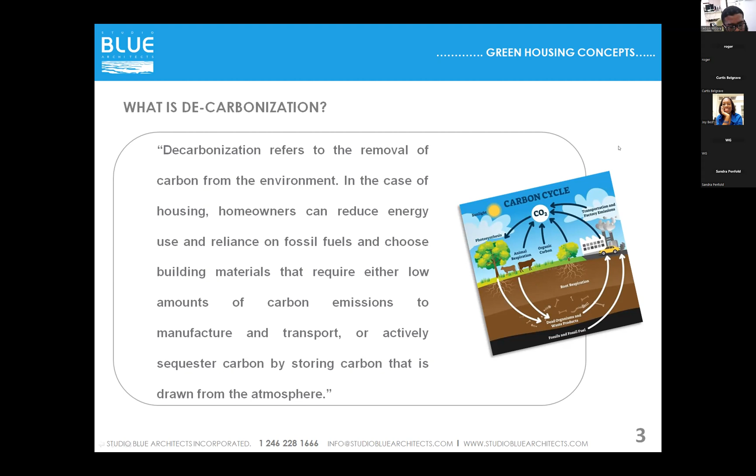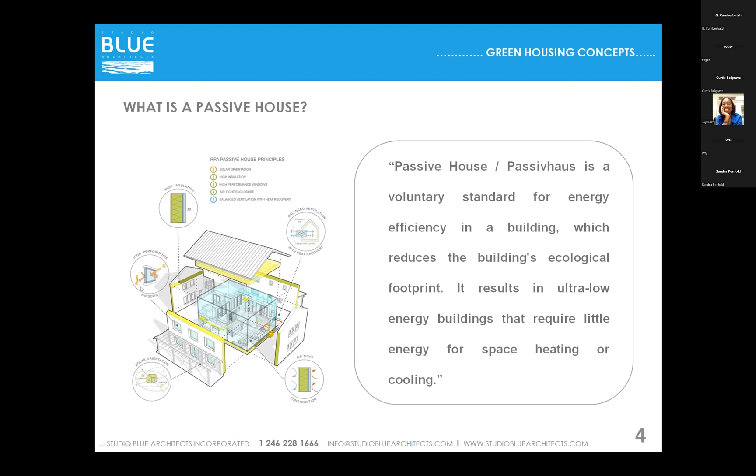What is passive house? Passive house is a voluntary standard for energy efficiency in a building, which reduces the building's ecological footprint. It results in ultra low energy buildings that require little energy for space heating or cooling. In our climate, we're not too worried about the heating aspect, we definitely want to avoid that. But in colder climates, you might be looking at, to some extent here too, what type of insulation can you use, how can you orientate your building, which is definitely relevant to us here, balanced ventilation with the design aspects, maybe high performance windows to reduce heat gain. All of these are things that passive house design would look into.

What is sustainable architecture design? This is defined as a design which meets the needs of current generations without compromising the ability of future generations to meet their own needs.

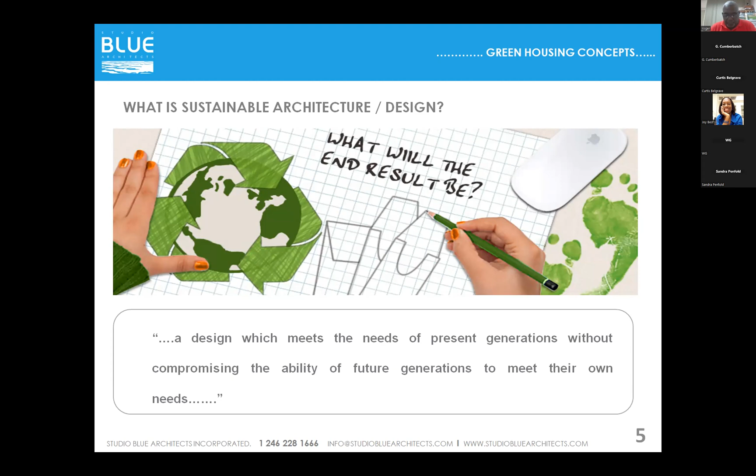So how are we going to be using the resources right now so that we're not using them all up, or compromising future generations' ability to do what they need to do just as we have. So to make Barbados housing greener, I think we need to tackle the following.

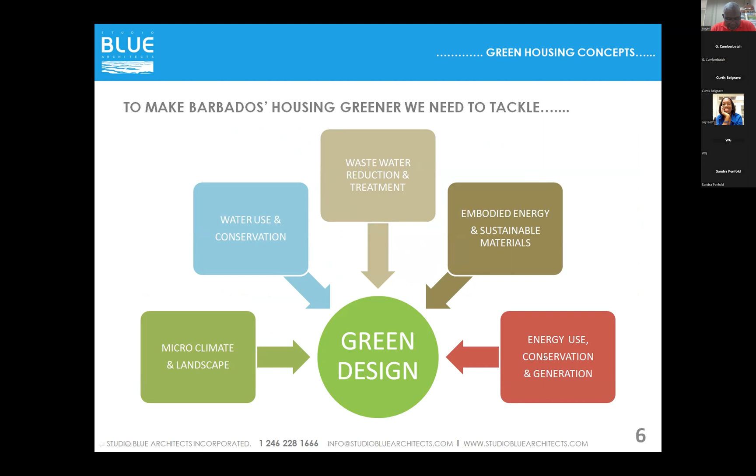We need to consider the microclimate and landscape. We need to look at water use and conservation. We need to tackle wastewater reduction and treatment. We need to consider embodied energy and sustainable materials. And last but not least, we need to look at our energy use, or energy conservation and generation.

So I'm a very visual person, so I've dropped a couple of slides in here to give you a visual of what we're talking about. So microclimate and landscape - we're talking about the spaces around the building, front gardens, back gardens, the spaces outside of the actual building itself, which will have an impact on how much energy you're using in the building. So whether that space is softly landscaped or hardscaped, all of that will impact on the energy that the building consumes or needs to consume.

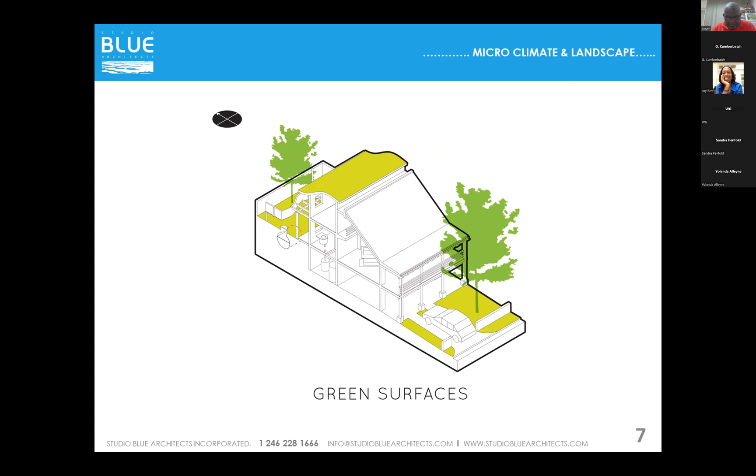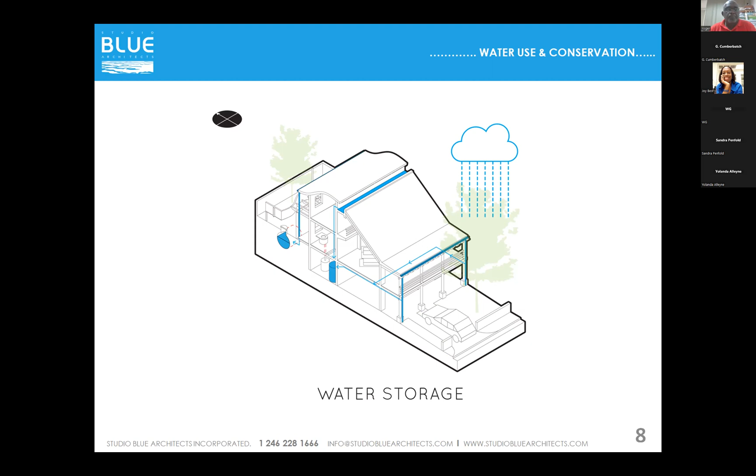Water use and conservation - I'm not going to dive into this too much today, but suffice to say that if we're harvesting rainwater and using it for flushing toilets, irrigation, washing cars, that's going to reduce the water we're pulling from the Barbados Water Authority's grid. That water doesn't get to us by magic - they use a lot of energy to pump it through the mains to us. So the less water we're using means less energy being used on a national scale. So that has an impact in that way.

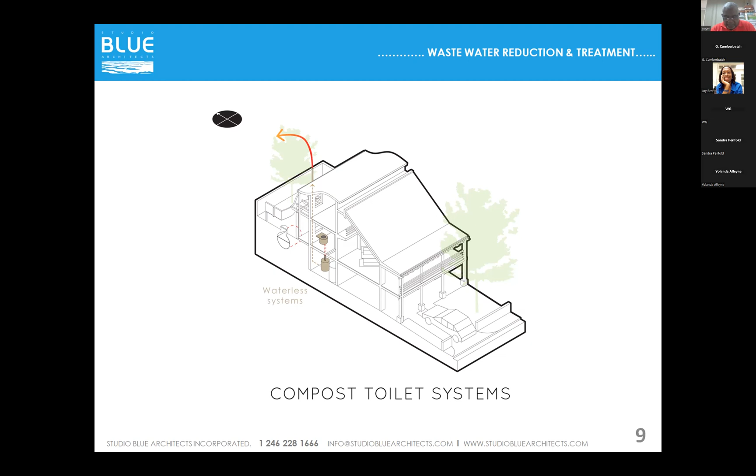Wastewater reduction and treatment - depending on how we're dealing with our sewage and wastewater, that takes energy, whether it's being treated at the South Coast Sewage Project, the Bridgetown Sewage Project, or in larger developments with sewage treatment plants. If we can reduce the amount of sewage we're generating, that will mean the energy used to treat that wastewater is reduced. There are other environmental impacts on our drinking water and coastal environment if we can reduce and treat our wastewater.

Sustainable materials, embodied energy and sustainable materials - so where do the materials that we use come from, and what energy has gone into making those materials?

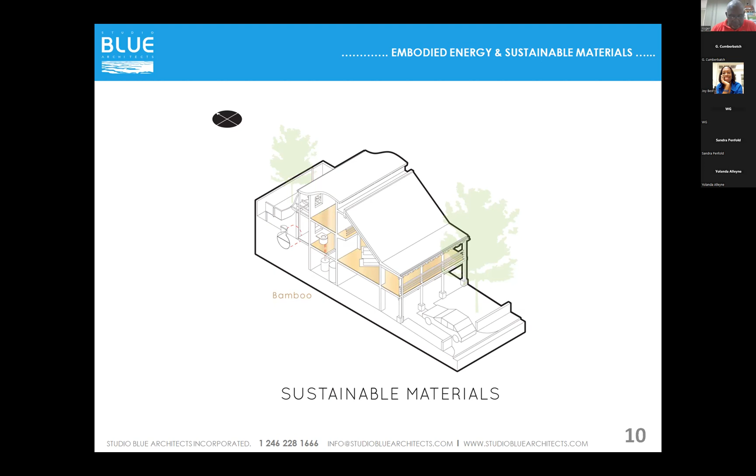Energy conservation - I like to think that if we can start with reducing the amount of energy we use first, before looking at how we're going to put PVs on the roof to generate the energy we need, that will mean the energy we use will be less, and therefore the PV system or wind turbines can be that much smaller and use fewer resources.

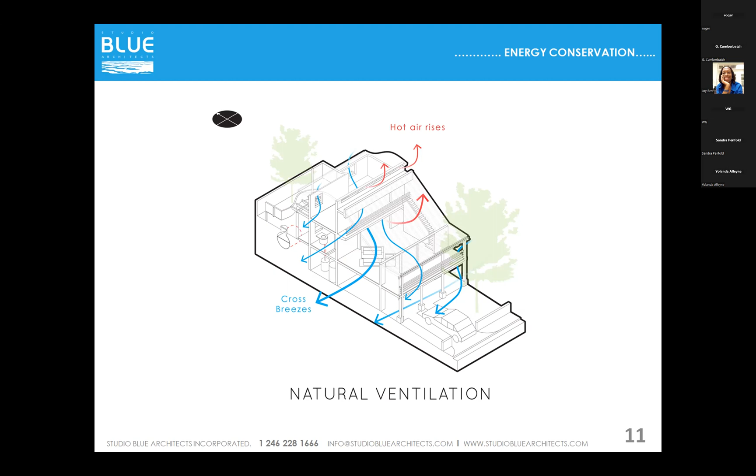One of the biggest users of energy in housing in Barbados and the Caribbean is typically air conditioning. So if we can look at natural ventilation, how the building is designed to maximize airflow through it, to make the space habitable, cool and comfortable, then we'll be a long way towards reducing the energy we're using. There are many ways to skin a cat, so to speak.

One way - I am very passionate about landscaping and how that interacts with the building I'm designing. Trees and planting have a big role to play in shading buildings, shading spaces, and contributing to that microclimate - the space immediately around your building, and how you can control that to make it cooler, therefore reducing the need for air conditioning and fans and other things that use a lot of energy.

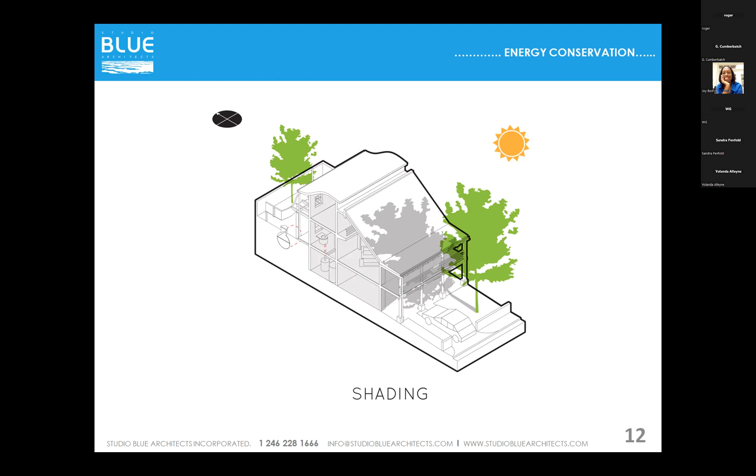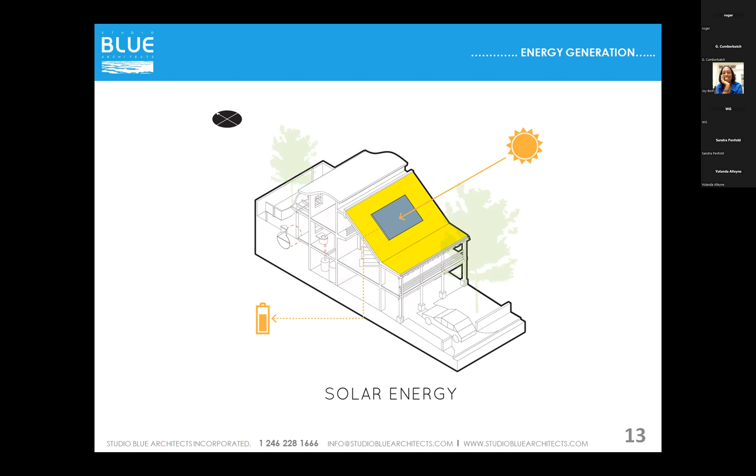Once we've done all of those things, then yes, we can look at how we can generate our energy in a sustainable manner, whether it's photovoltaics, wind turbines, or solar hot water heaters. A lot of these are becoming much more mainstream than they were 20, 30 years ago.

So just to focus in on the energy then in our buildings - how do we reduce the energy required by our housing? I've touched on microclimate and landscape, I'll expand on these in a minute - natural ventilation and daylighting, solar heat gain and shading devices, and embodied energy and sustainable materials.

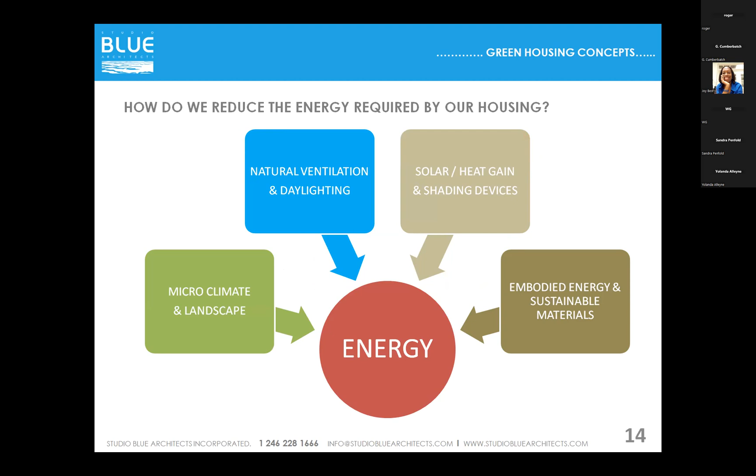Microclimate and landscape: all projects will start with some sort of site analysis. The first obvious thing is to identify where north is, which gives us an indication of where the sun is rising and setting. In Barbados and the Caribbean, during the summer months the sun is going much more overhead, but very slightly north of overhead. In the winter months, the sun will be a little lower on the horizon, not quite as low as this diagram suggests, which is probably more for a North American location. What this means is that predominantly the east, south, and west elevations of our buildings will be getting much more exposure to sun than the northern elevation.

That leads us to think about the building in different ways. We also want to identify where the wind is coming from, because that's what we're trying to get through our building for natural ventilation. That's generally coming from the east or east-northeast direction, which drives how we orientate and organize spaces within the building.

What's the topography, the slope of the land, and how does this impact on the siting of the building or buildings, and how does that impact on the wind flow? For example, if you're on a site on the western side of Barbados sloping facing the west, your building may be looking west, but you're trying to get the breeze from the opposite direction. So all of these are things you need to understand to tackle these issues.

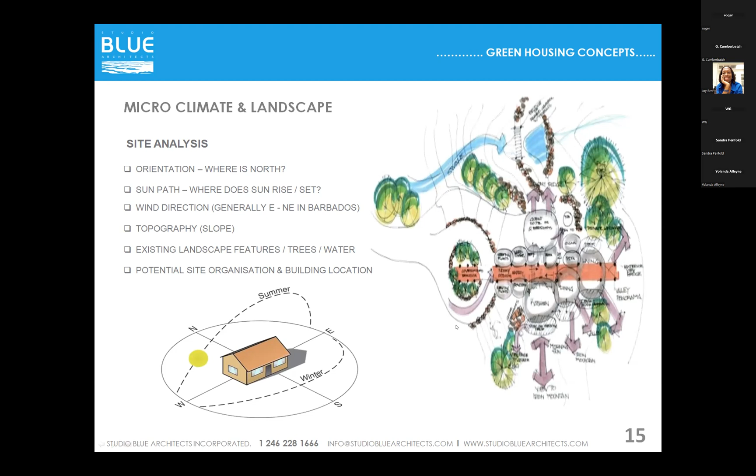Natural ventilation and daylighting - it's very important to understand that you're not going to get any breeze flowing through the space if you've only got an opening on one side. So it's important to think about where your openings are, having openings on both sides so you can get cross ventilation. What's important as well is where those openings are located - if low down or high up, that drives where the breeze is actually flowing. The idea is to get air movement across the body where you're going to be located.

So if the space is predominantly used as a sitting room or TV room...

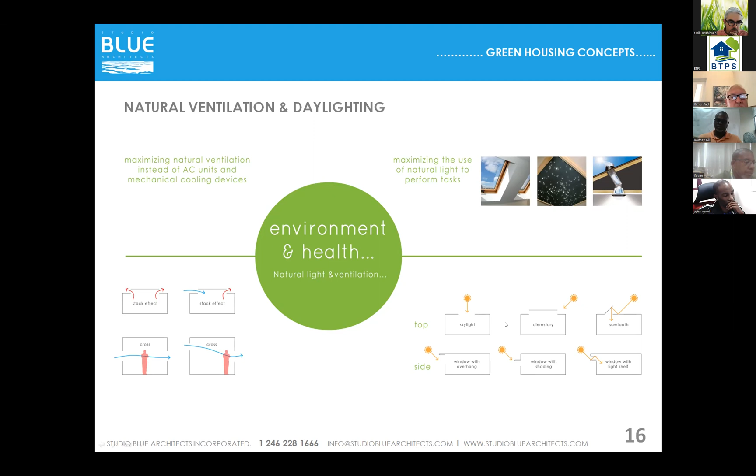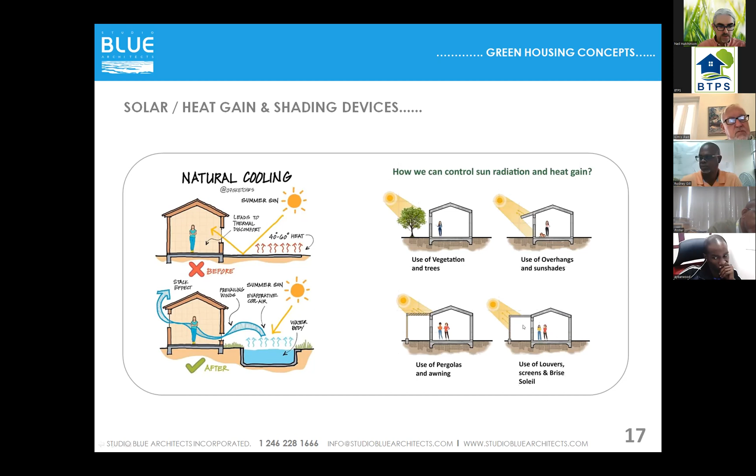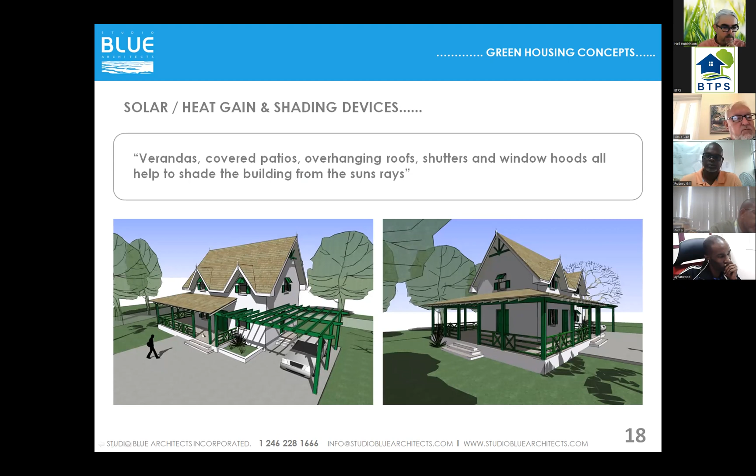Again, in this design, you can see we're thinking about trees and planting and shading to control that microclimate. And the other thing you're seeing is overhanging eaves up here again, which will help with that situation.

Something that's not used enough in Barbados is insulation, particularly in roof spaces, whether it is a rock wool type, or what's much more affordable and quite easy to install - what they call R-foil, which looks like foil with bubble wrap attached to it. That works really well and is very affordable.

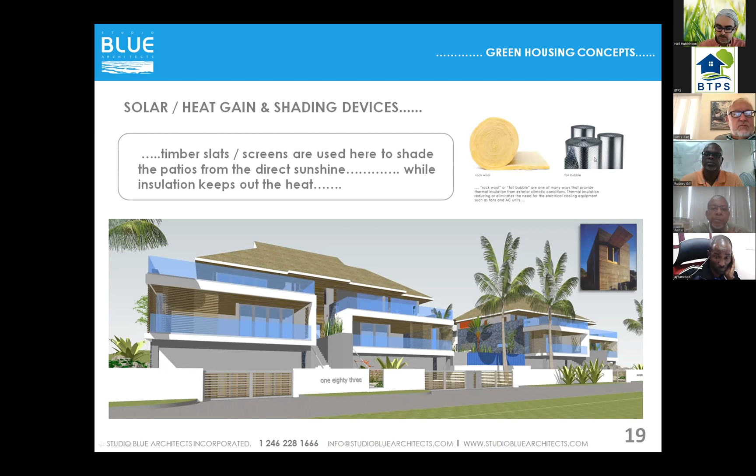Once you plant - if you move onto a site that's already got a tree, then you're winning. You're already in the right direction, because air conditioning has a huge cost, obviously in money you have to fork out each month to run it, but also in terms of generating carbon that we're trying to avoid putting into the atmosphere. Whereas a tree is taking carbon out of the atmosphere and providing shade. So I can't shout loud enough about the value of trees.

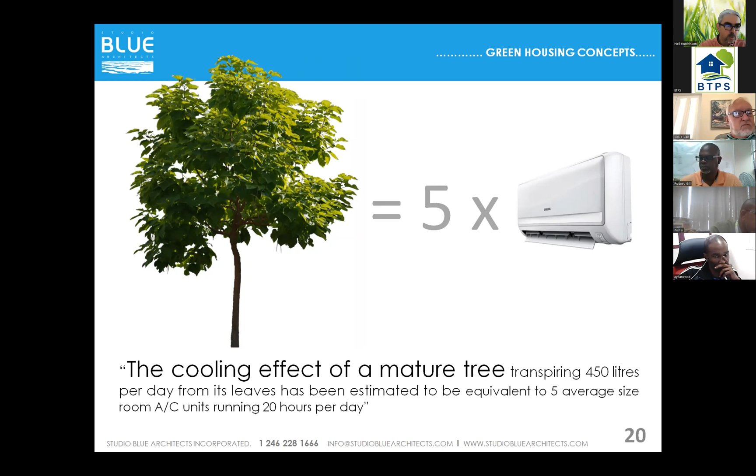So what is embodied energy? Embodied energy is the amount of energy it takes to create an object or material and get it to the location where it is to be used. So that material, to make it - aluminium or something, a stone - it's got to be mined, quarried, extracted out of the earth. There's some manufacturing process to turn it into that product.

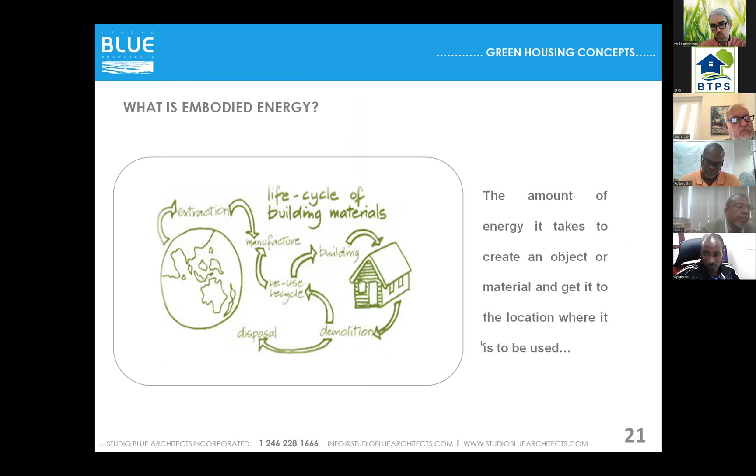There's probably some packaging that goes on around it. Then it's put on a truck or a train or shipped across the Atlantic to Barbados, then picked up at the port, put on a truck, and delivered to site, and put into its final purpose. There's a lot of energy going in to make it and get it there before we even use it. And that's what embodied energy is.

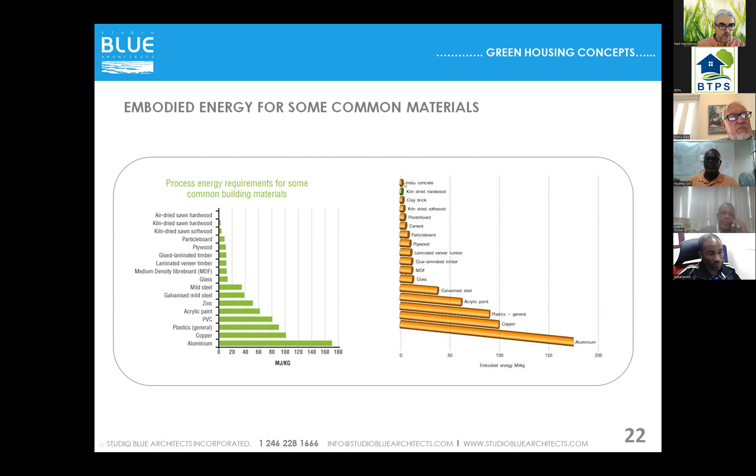And similar thing on this chart here. Cement is interestingly somewhere, in-situ concrete is somewhere here in the middle of the chart or close up here. I think concrete blocks for Barbados could be quite a good solution. They are made here, obviously we do import the cement.

But in terms of something which is made locally and used locally, that's not a bad option. So where do your materials come from? Those are questions we should be asking and weighing up when we decide what materials we're going to be using. Things like bamboo flooring are a good solution because bamboo grows really quickly, so that's a very renewable resource. Composite decking and things like that use a lot of recycled content in the material.

EnviroShake, I know that they use a lot of recycled content in their material, their product. But also locally we have Duratile, which is the roof shake made from recycled PET bottles. That's great, that's made locally and it's using recycled content. So that's something we should probably be looking at a lot more.

Other green aspects, other than sustainable materials, just to touch on quickly - paints. We use a lot of paints. If we can use the low VOC ones, these are going to be much more healthy and more environmentally friendly as well.

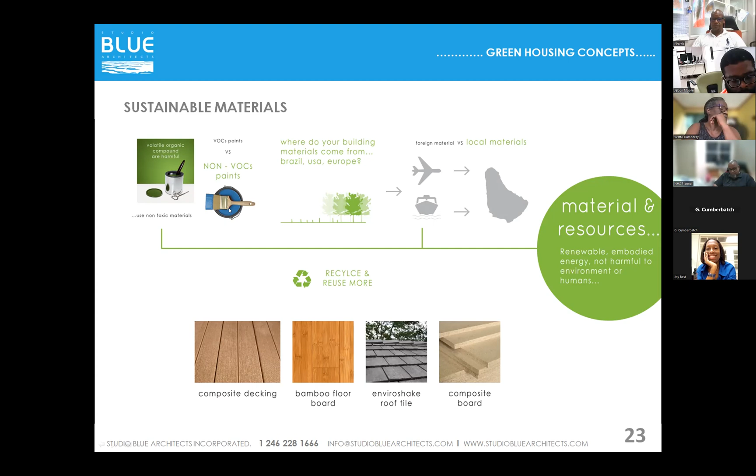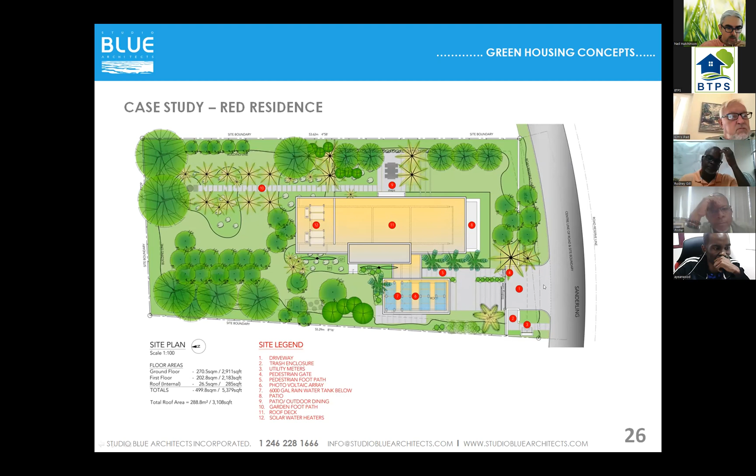But already you can see that we're thinking in this plan, which was done by Kevin Talma, in terms of landscape. We're looking at planting, trees, shading. There's very little hard standing, pretty much only really where needed at the front here to get into the garage, and some walkways around the building.

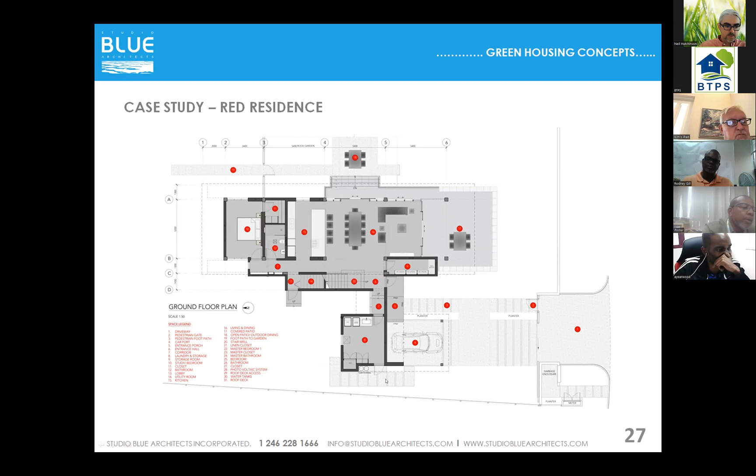This living, dining, kitchen space has floor-to-ceiling windows all along the east, louver windows so you can maximize ventilation. This kitchen door here has louvers in it, so again you can get breeze through. There's windows here, windows through the laundry, right through here.

We did make provision for in the future that if they did sell it or if they did change their mind, they could come and easily install the air conditioning, but that's 2 or 3 years and they haven't done that as yet. So this space is a wraparound patio on 3 sides here, again using the building form and shape to provide shade into the main structure.

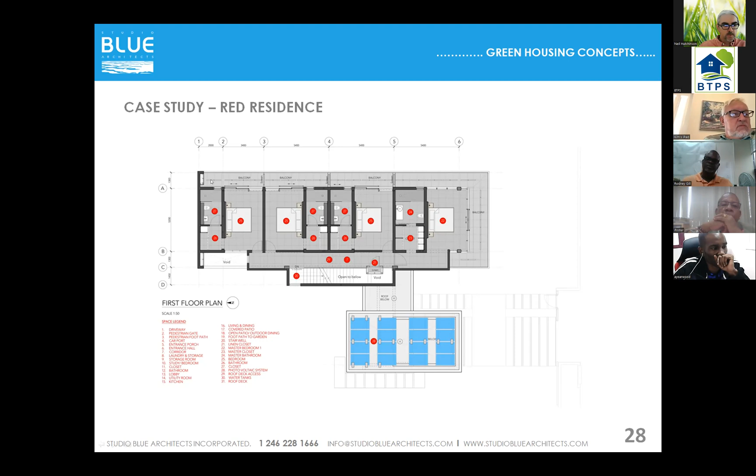This is where I'm talking about a typical bedroom. On the eastern side, we have these 2 banks of louver windows, and then there's a glass sliding door. This can slide back in front of these louver windows, so you can have this whole thing open.

I'll leave you one last tidbit. Humans are only one factor in the ecosystem, but quite often we don't see it this way. We kind of see ourselves apart and we call other factors or species natural resources or simply nature, so everybody's captivated about trying to protect nature. But once we accept that we're part of the ecosystem, the objective of sustainable design then becomes how do we have a beneficial, positive input to the ecosystem rather than a negative input, and rather than how do we prevent the ecosystem from being influenced by humans. So we need to think about our input into the ecosystem being positive rather than negative.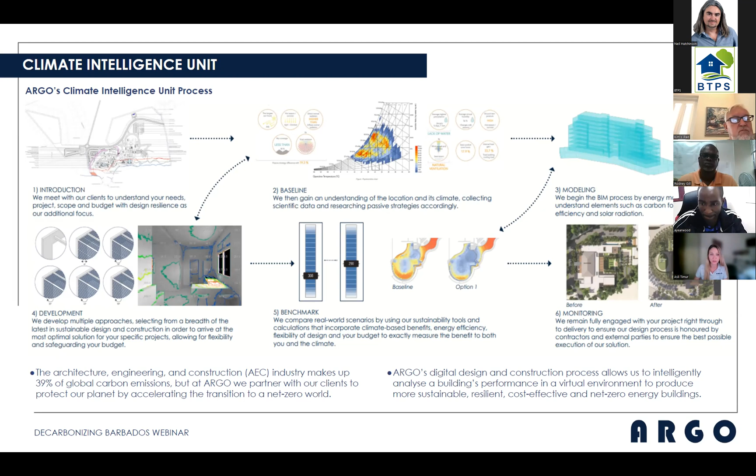Argo's digital design and construction process allows us to intelligently analyze building performance in a virtual environment, resulting in the creation of environmentally friendly, resilient, cost-effective, and net zero energy buildings. Our team also focuses on designing LEED certified homes that promote clean indoor air, natural light, and the use of safe, environmentally friendly building materials to ensure optimal comfort and good health for the occupants.

LEED is the world's leading green building project and performance management system. It's a globally recognized symbol of sustainability achievement and leadership. LEED certification offers significant benefits, including improved health conditions for occupants, substantial energy and water savings up to 60%, and increased property value with faster sales.

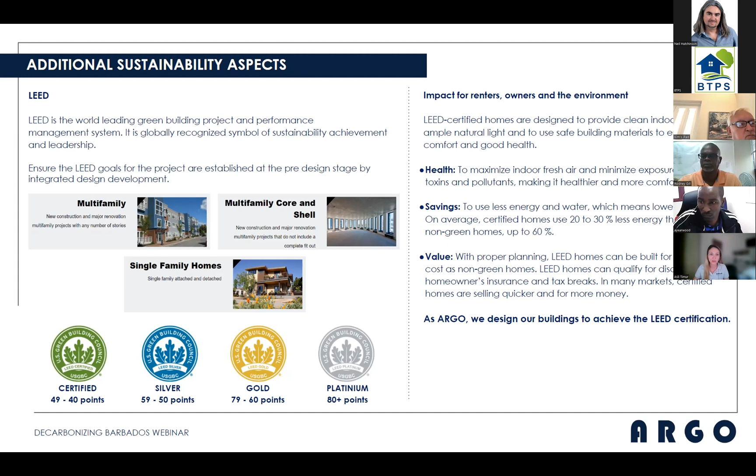Now I will move on to case studies. I will introduce one of our case studies, and then my colleague Gavin will continue to explain further. Our first case study is Apes Hill Villas. We used BIM technology, building information modeling.

It's a cutting edge and integrated methodology-assisted system-built approach that provides increased passive ventilation with climate-adapted shading strategies. We also use electric vehicle level 2 charging, which was designed to be in the villa carports.

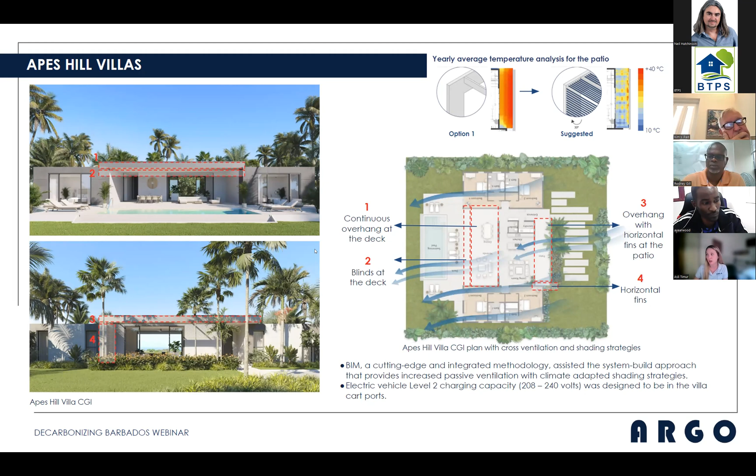The roof is covered with reflective roof membrane, which is an environmentally responsible, energy saving, and waterproofing solution with the highest solar reflectance index listed in the Cool Roofs Rating Council at 115. Also, PV panels with 505 watt and 21% module efficiency were designed to be located at the roof level to produce more energy than what the building actually consumes.

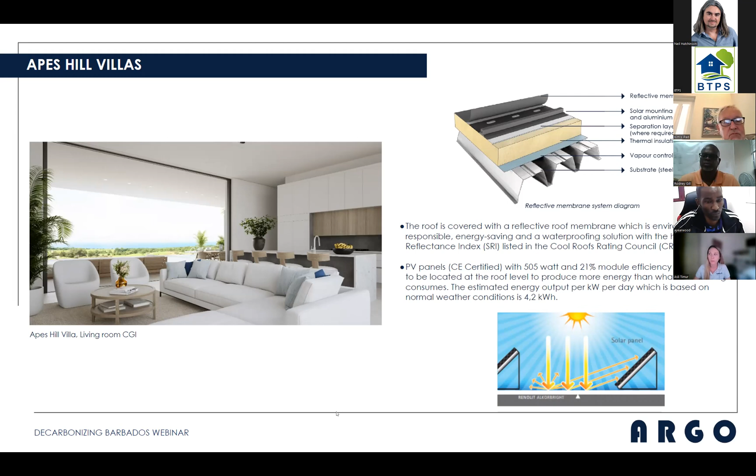The estimated energy output per kilowatt per day, based on normal weather conditions, is 4.2 kilowatt hour. The wall consists of Gyprock wallboard, which is a fire resistant and acoustically insulated plasterboard. Rock wool insulation is applied to the outdoor facades with a recycled content between 16 to 40%. The vapor control layer ensures air tightness and prevents condensation.

It effectively separates the passively ventilated area from the mechanically ventilated areas. For the windows and doors, we designed laminated glass with a gray tint, which provides light control and safety. The Schüco door systems offer high thermal insulation, energy efficiency, and soundproofing properties, promoting comfort and sustainability while minimizing energy consumption.

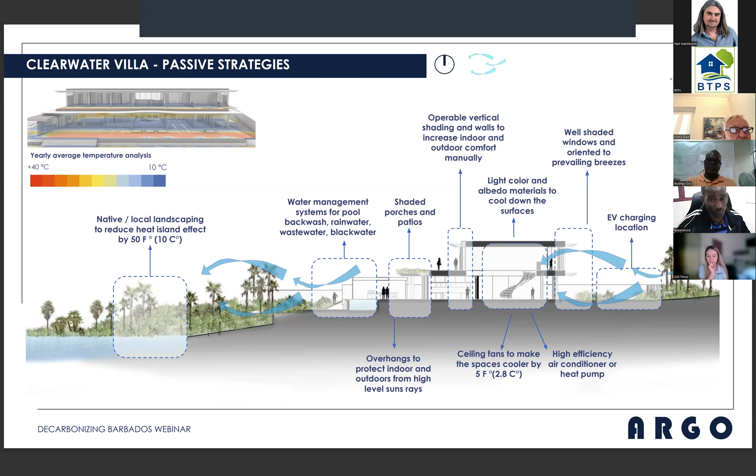I'll go into more detail because with this project, what we sought to do was look at 2 options. The first of which was doing Clearwater and presenting it as a villa. The second of which we presented it as a condo option.

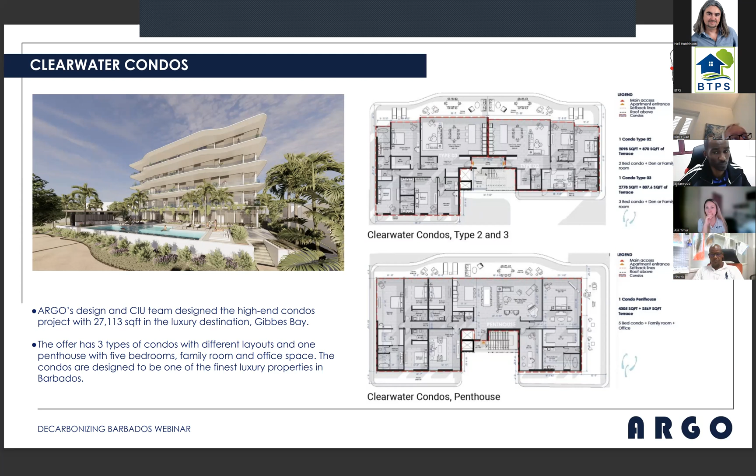With the Clearwater condos, our design and climate intelligence team sought to take the same property and develop it instead as high-end condos consisting of 27,113 square feet, again on Gibbes Bay. This offer has 3 types of condos with different layouts, including 1 penthouse with 5 bedrooms. It has a family room and office space, and the condos are designed to be one of the finest properties in Barbados, but we're trying to do it in a very energy efficient way.

Taking a look at our passive strategies again, you can see how we've utilized very similar systems to what we described on Clearwater Villas, where we're taking into account the passage of the sun and wind direction to allow for natural cooling, shaded porches, and water management. Essentially this is how we approach our passive design strategies.

And when we look at passive design strategies, there are steps that we go through. We start by looking at the orientation and building form. We look at shadings and overhangs. We look at natural ventilation. We look at natural daylighting, and essentially a passive solar design.

With respect to orientation and building form, proper building orientation can optimize natural light and heat gain. So positioning windows to capture daylight and solar heat during the colder months while minimizing direct sunlight during the summer, and using the building form to enhance natural ventilation and airflow.

With respect to shadings and overhangs, we strategically place shading devices such as roof overhangs, awnings, or louvers in some cases, to help block direct sunlight and reduce solar heat gain, particularly on the windows and glazed surfaces. This reduces the need for excessive cooling and helps maintain a comfortable indoor environment.

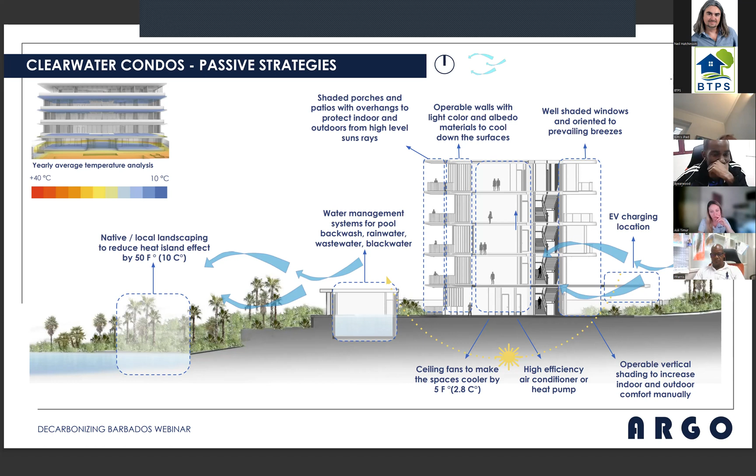One of the other things we looked at with the project, given that it was a reimagined project, is waste management. Construction waste management focuses on reducing, reusing, and recycling waste generated during construction projects. By implementing waste management plans that include sorting and separating different types of waste materials on site, we encourage the reuse of materials by salvaging and repurposing the waste.

The buildings on the property, as much as we would like to redesign them, are currently inefficient in the use of their space. They have low energy levels and do not have the hurricane ratings that are critical for the Caribbean. So what we sought to do was reduce the demand for new resources by reutilizing some of the existing materials. This aids in cutting costs related to the production and transportation of new materials and eliminates the need to send waste to landfill sites.

In some instances, you realize that some of the materials used previously weren't environmentally friendly. We noticed that the roof contained asbestos, so we had to carefully look at the disposal of the materials.

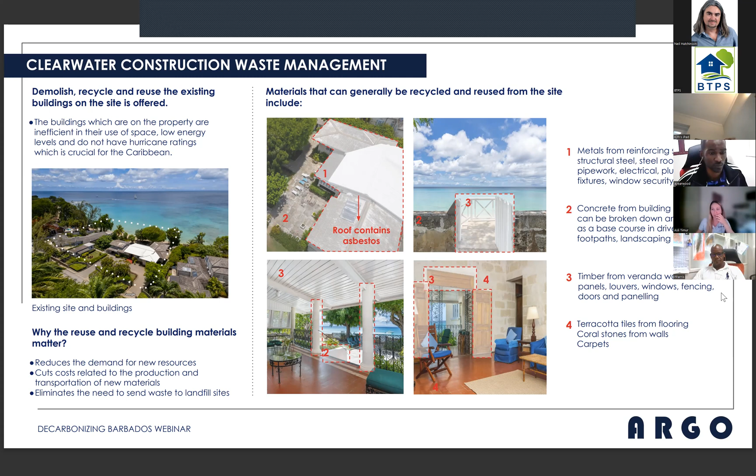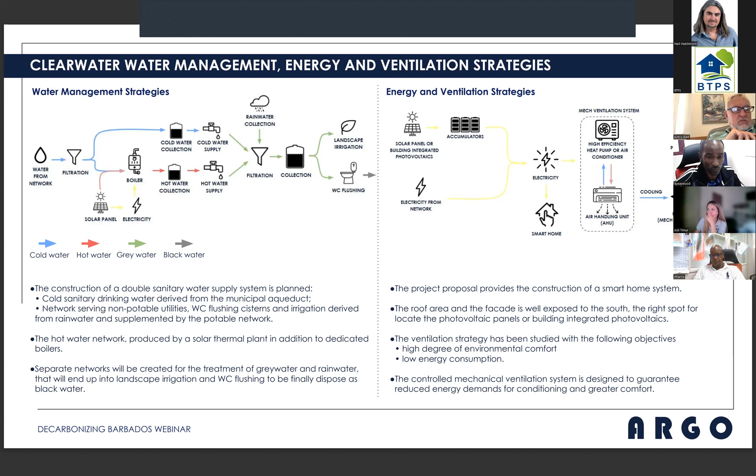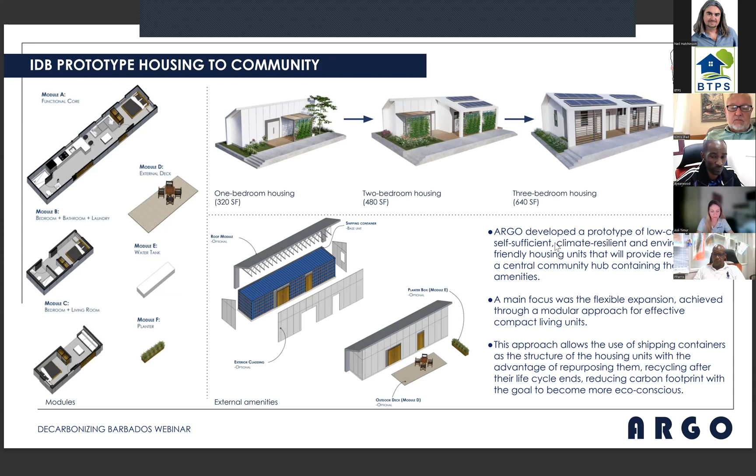From the diagram, you can see that we've produced three model types: a 320 square foot 1-bedroom house, a 480 square foot 2-bedroom house, and a 640 square foot 3-bedroom house. One of the main focuses while working on this project was to develop a plan with flexible expansion, achieved through a modular approach for effective compact living units. This allowed the use of shipping containers as the structure of the housing units, with the advantage of repurposing and recycling them after their life cycle ends, reducing the carbon footprint with the goal of becoming more eco-conscious.

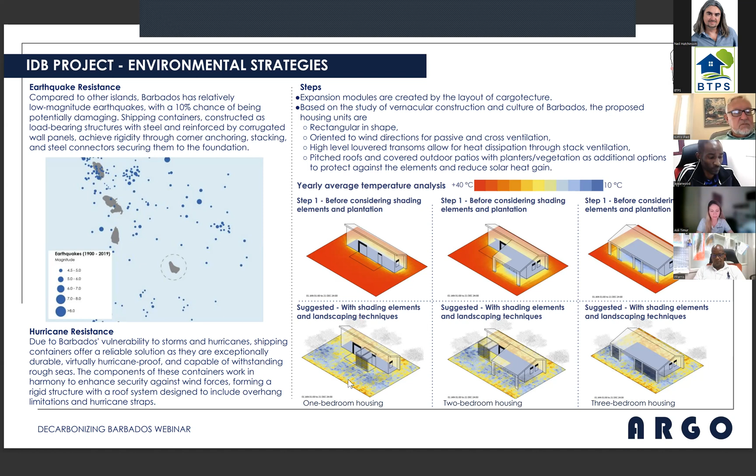If you take a look at the diagram in the bottom right, this was prepared by our climate intelligence unit. Essentially, they took our 3D model of the three housing types and ran it through a temperature analysis to look at what the temperature in the building would be before the orientation, shading elements, and vegetation were considered, as opposed to afterwards when we factored in the orientation and some landscaping and shading elements. Just by taking those measures, we were able to significantly reduce the overall heat of the building.

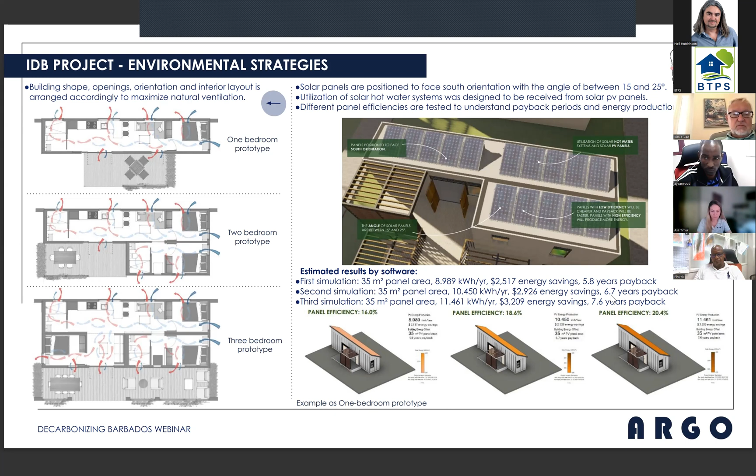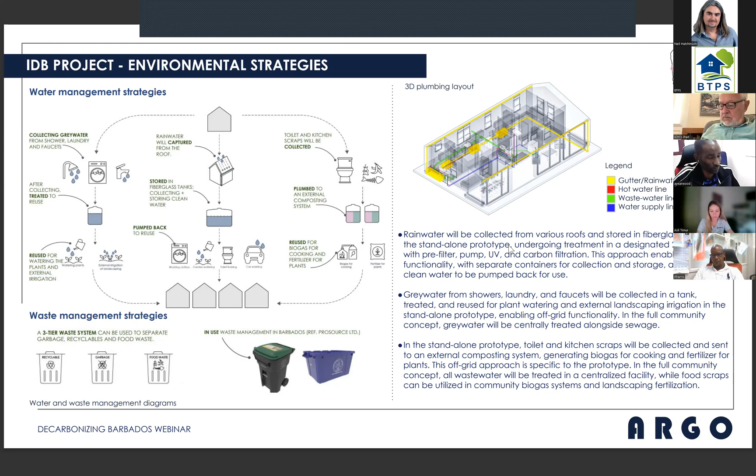Now, in terms of the overall design and the community that we're looking to produce, we've looked at doing parking with solar roof structures designed to utilize electric charging of the electric cars and provide energy to the community. The arrangement of the houses and public areas is designed to facilitate tertiary services at the ground level.

We have green spaces and parks that offer areas for residents to enjoy and exercise using outdoor activities. We're looking at the implementation of edible fruit trees as an asset for the community and visitors, and we're also looking at hydroponic farming that allows dwellers to benefit from local planting, and people, especially young children, can learn sustainable practices and teach others.

This brings us to the end of our presentation. In conclusion, we think that embracing sustainable and energy efficient architecture is not just an environmental imperative, but also a smart investment for a brighter future. By prioritizing these principles, we can create buildings that harmoniously coexist with nature, minimize our carbon footprint, and inspire a sustainable legacy for generations to come. Thank you once again for being a part of our presentation, and I'll turn it back over to you.

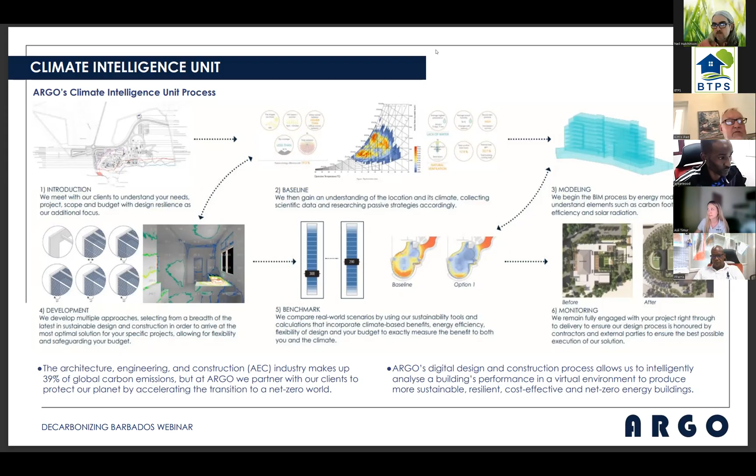Great, thank you. I've got two things in from the chat now, so I'd encourage more people to send in questions. The first wasn't a question, it says 'excellent presentations,' so there's positive feedback for the three of you. The second question is from the NHC planner, who wants to know: did the IDB project examine the cultural acceptance or implications of housing persons in containers, in places like Barbados, as an example?

I think that's a fantastic question. At this stage, I wouldn't say container housing is necessarily a new thing. There aren't as many examples of it in Barbados, but we did undergo some studies, carried out surveys, and discussed it. The quality of the finishes with these container homes, the insulation we're using, the standard is as good as almost any of the other products we're putting out.

So again, there are going to be barriers. I like how the question is posed, the implications of housing persons in containers. At face value, it is something that definitely needs to be considered. But if you see the quality of finishes being proposed, coupled with the cost effectiveness and the environmental and other savings that can be had from it, I think it's something that will be well received, and initially was very well received.

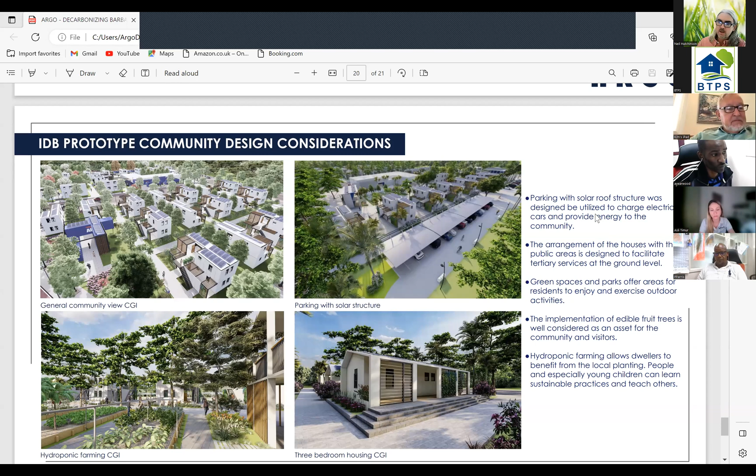That question was really directed at Kim as a planner, somebody sitting on the Barbados Town Planning Society. I was kind of playing devil's advocate, throwing that question earlier, because I think sometimes you may get a subdivision done, and then somebody comes along and figures out some sort of typical design which is dropped on there afterwards. By which time it's a bit too late. You may be just looking at how you're going to mirror and rotate some houses to try and make the best of what you're given. Whereas, in an ideal situation, you would have what you have here, where you are involved as a unit designer. You're involved from day one, and you have some say in terms of how that master plan works, and in terms of the best way to divide up and put the roads in, therefore allowing for fronts and backs of houses.

Because, just for example, if you have a development road running north-south, and the lots to the east and west of that road, then some houses may have the front looking east, and some houses may have the front looking west, and need a very different design to deal with those in terms of natural ventilation.

Neil, absolutely, thank you. Can I come back to you? It's Kim.

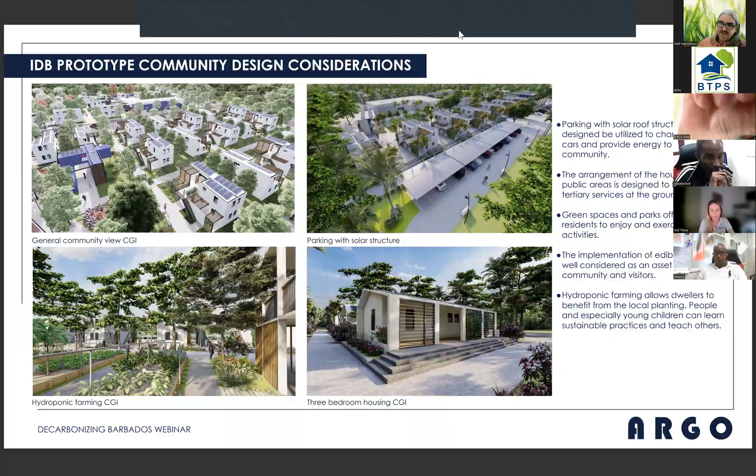I thought you were trying to get a planner response, because what I think is also significant is not just that we're talking about a subdivision where a public sector development is going on, but we have lots and lots of private sector subdivisions all over Barbados, where I think the actual orientation and climate relationship of the house that eventually gets built is probably the last thing that's thought about in putting together those subdivisions. They take account of an efficient road layout, perhaps. They take into account the water reticulation issues, so everybody gets their water. And they probably take into account issues about getting as many of the particular size plots that people are looking for from an economic point of view on that site as possible. But there's no question of master planning going into the way we divide up land into subdivisions.

And I think it's an issue that we need to take into account.

I think maybe there's a need on subdivision applications for more pre-application discussion than there tends to be on them, because they're almost just a change of use with a drawing which comes along with it, and you worry about where the houses are going to be later. So I think I'm very much with you.

I support a master planning approach for any major development. That sort of approach where you kind of just subdivide the land and then sell off the land, and somebody comes along to create their own design, well, then the designer can work with whatever condition they're given to create the best layout.